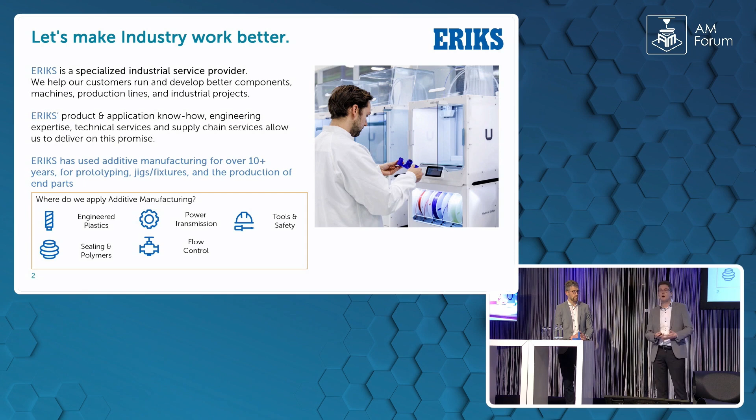And we have been applying additive for the last 10 years. First, really with seals production, so that we didn't have to make a mold. We made prototypes. Then afterwards, really with jigs and fixtures, and now we're also in end parts. And we do this for various departments, not just for plastics, but also in the realm of flow control, safety and tools, as well as in power transmission.

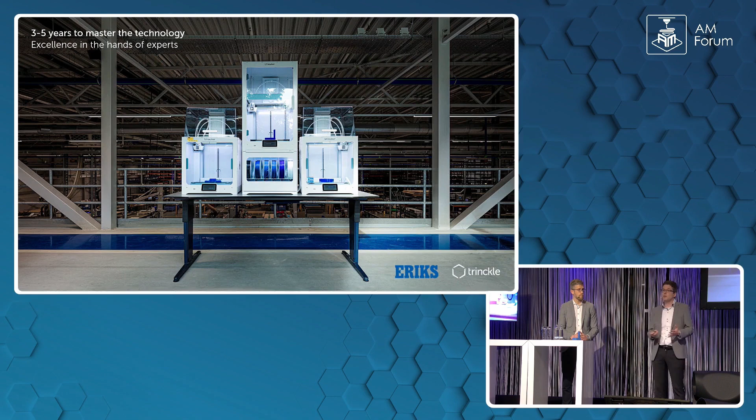So one of the things that really intrigued me, I've been now busy with this topic of 3D printing, additive manufacturing for about 7 years. And what really intrigued me is always how it still takes quite some time to really master this technology. So how you can mitigate for the shortcomings, but also really make sure that you utilize it for where it really works best. So having the engineers really engaged with this technology, ingraining it in their daily processes, and really thinking about how to use it next has been quite the journey for them.

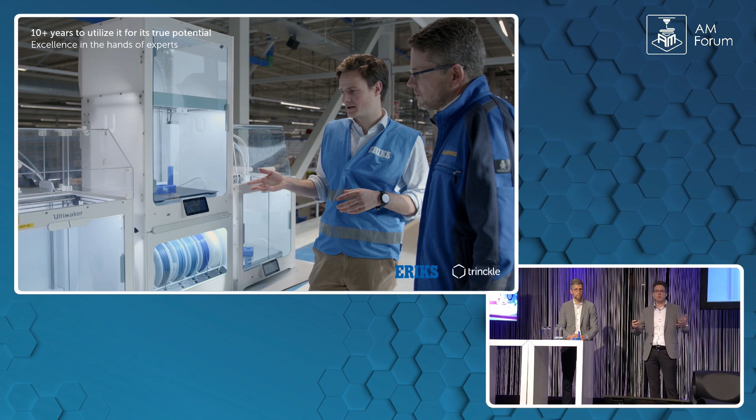But there's another journey that's going on, and that's, of course, the company, where we are with 5,000 people, of which more than half is sales, and a lot of distribution and production as well. And how do you adopt it, for example, in a larger company? This has been also quite a journey, where we first had little islands where we were doing some printing. That became a central team, really pushing hard for adoption. And eventually, we really chose a community approach, where we had many printers scattered around, and people were really adopting it in their own departments.

So I didn't expect this myself, but jigs and fixtures has been one of the key drivers of the adoption within our company. So we first came from prototyping, and then we really went to jigs and fixtures. And I think it's also a nice way and a nice blueprint of how to ingrain this in your organization. Not just from the fact that jigs and fixtures can really help you with the efficiency of your processes, so really already giving you that efficiency benefit.

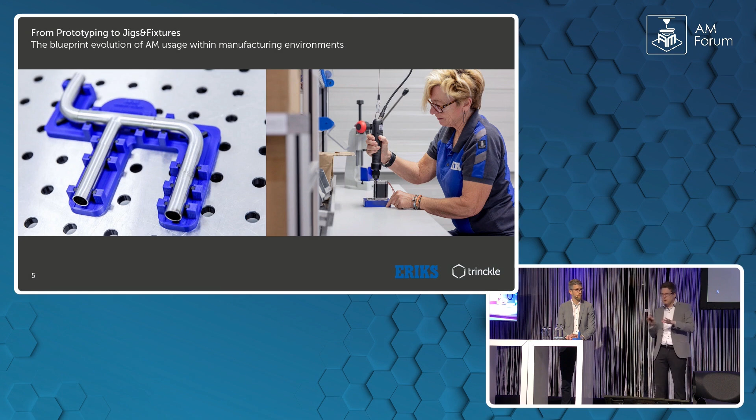It's also a very tangible result, but it's also a tangible result to many different groups in your company. So this is the engineer, but also in production manufacturing, also with quality control. And for the people that really love numbers, the efficiency, of course, really helps with the people in continuous improvement or in finance. So it really taps into different parts of the organization, really helping with this adoption. So we're finding them everywhere.

And we're also not really particularly focusing on one or two, but we have assembly tools, we have machining fixtures, welding tools we're experimenting a lot with, and we're making them a lot as well. Shot blasting tools so that you cover off areas, but also safety jigs. So there's many ways how we basically apply it.

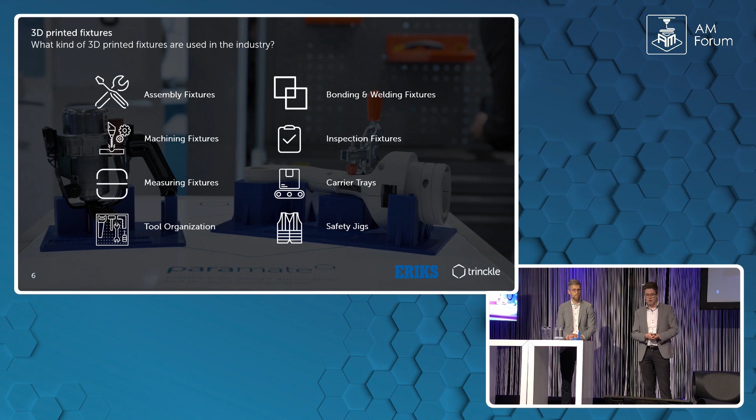And I want to show you one of the latest examples. So it's this one, and I will have one of our engineers do the talking for me. So this is a small jig that we made, and it's to help the people in our production facility to assemble the parts together. It's made out of a motor and an electronic component.

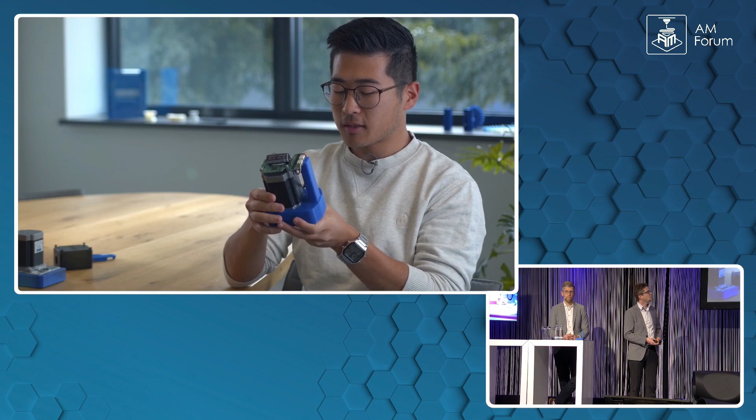As you can also see, this electronic component sticks out a little bit, and whenever they would assemble it together, it could flip over to the side because they have to apply a small amount of pressure on this side. So by making this jig, we made their job significantly easier for them. And where they would be struggling with getting all the parts assembled, they can now do this in maybe 1 minute instead of taking 2 to 3, because they would struggle with keeping the parts aligned with each other.

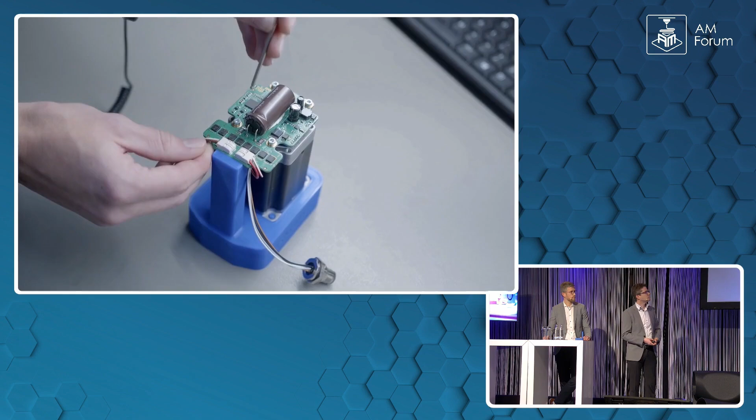So as you can see, I mean, it doesn't look too fancy, doesn't look super sophisticated or high-tech, but it really works. And the thing for us was, okay, so the potential of all these jigs is there, so why don't we see hundreds of these jigs in our organization pop up? Why don't we have a lot of people engaged in this?

And then we really realized that you always need an engineer to draw them, or you need to have a very good drawing, and then you need to engineer the counterpart, which takes quite some time. So how can you reduce this bottleneck? How can you make sure that the CAD design processes that are now restricting this creative process, let's say it like that, do not hamper this anymore? And this is why we chose Fixture Mate.

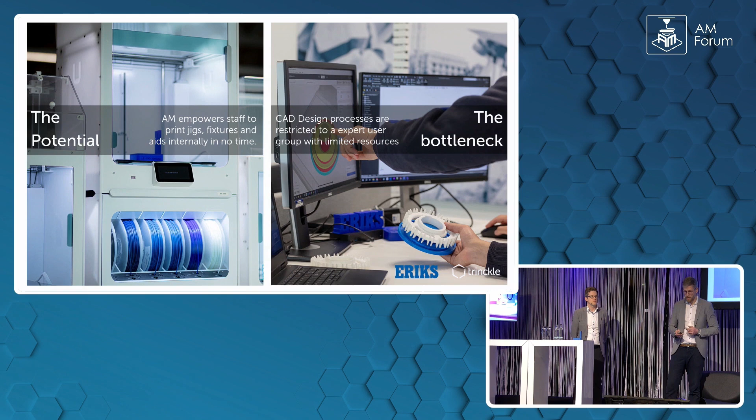Yeah, thank you very much, Job. And this combination of the potential of the technology, and on the other hand, the bottleneck of the engineering, we see at quite many of our customers. And that motivated us essentially to bring up a product which is called Fixture Mate. So a design automation software dedicated to this kind of application, for creating fixtures.

And there are basically two goals. On the one hand, we want to make the whole process more efficient. So we want to tremendously reduce the minutes, hours you have to invest into this. So we speed up the design process for experienced engineers. And on the second aspect, it shouldn't be focused on the engineers only anymore. So we want to enable people without deeper CAD skills to design those kinds of parts.

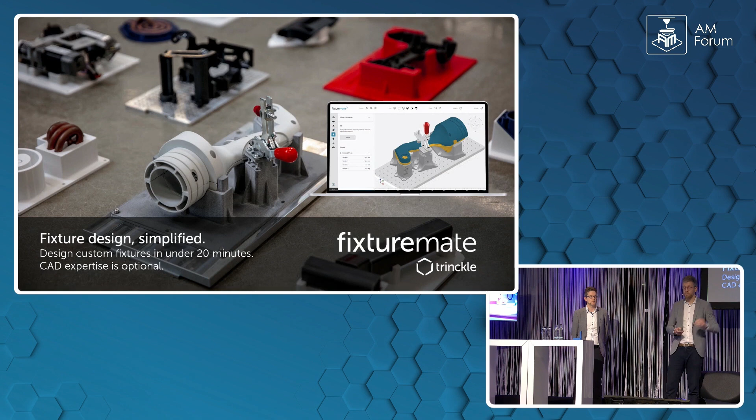We are not talking rocket engine parts here. They are simple parts, and these design jobs are quite good in the hands of the people that actually need those fixtures in place. So we want to enable them. That was the target. And I want to show this on one example from ERIKS.

And what we see here is a cover which has some motor and gear elements inside. The cover is meant to protect it in a rather challenging environment. So you have to assemble a couple of very small, tiny parts inside this cover. And we learned that for this assembly process, it would be great if you had two positions, one upright, like on the left side, and one slightly tilted on the right side.

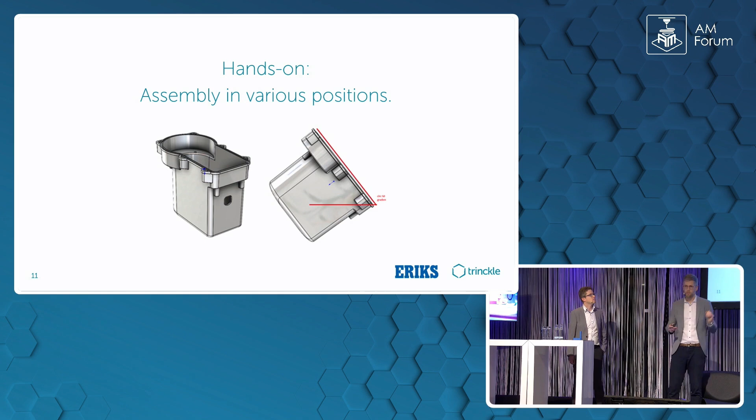And ideally there would be a fixture that has both positions in one fixture. You can change the position, and this little hole in the front should be accessible at all times. So that is the target for a little fixture here. So this is the end result.

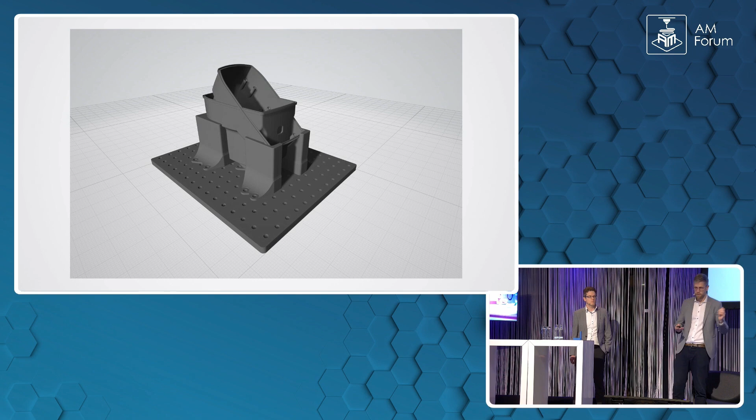I hope you can kind of understand what you're seeing, because we basically tilted the position of the part, and we now have that in this rendering. We see both positions of the part in the fixture already. So quite a nice, easy fixture. And now I want to show you how we would design that in Fixture Mate.

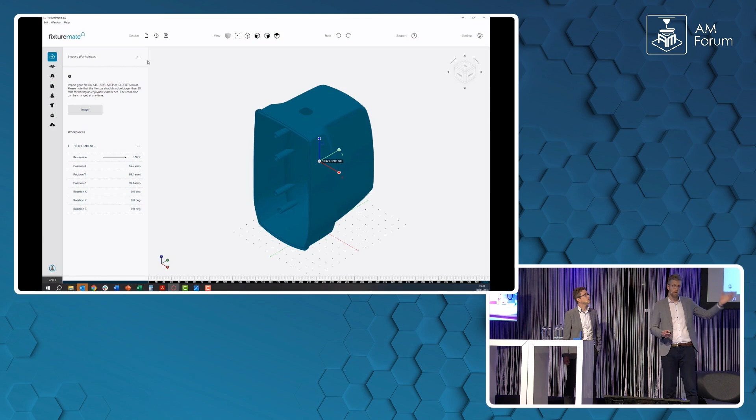So let me talk you through this process. Remember, the ultimate goal is we want to enable people that do not have in-depth CAD experience. So this is why we bring them through a quite intuitive process from uploading a part to downloading and exporting the fixture.

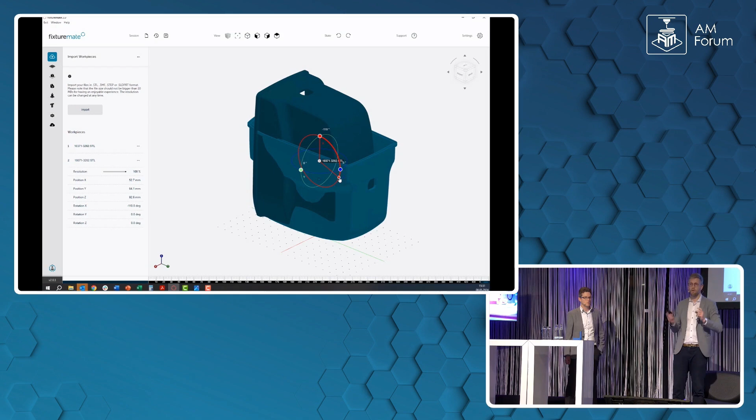So I bring in this cover. I bring it into the first position and I position it in an orientation I like. And then I bring it in a second time. So I want to create the second orientation, the second positioning of this cover. So now slightly tilted. And so you guys can recognize it easily, I color it in a different color. So we have this blue and now the yellow version as well.

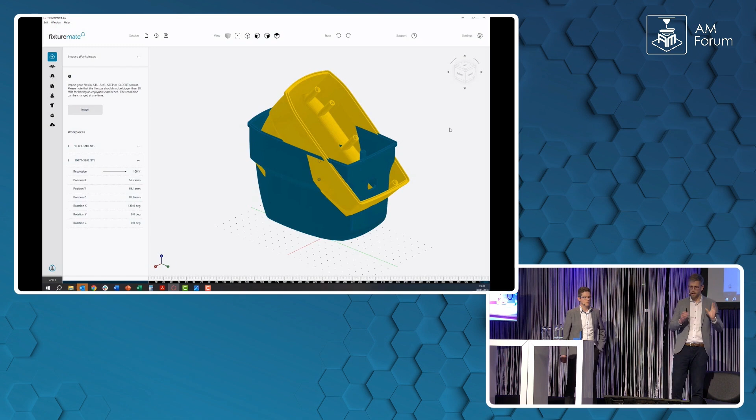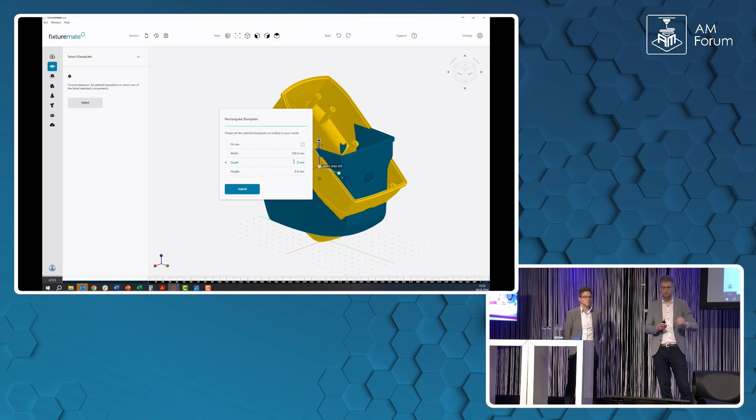And now for these two orientations, I want to create a fixture, basically a nest geometry. The first thing that we do is we choose a base plate. So in the second step, I have the chance to design my little base plate here. Let's start for a moment with a 3D printed one. So imagine the overall nest would be on one plate, even the plate is 3D printed.

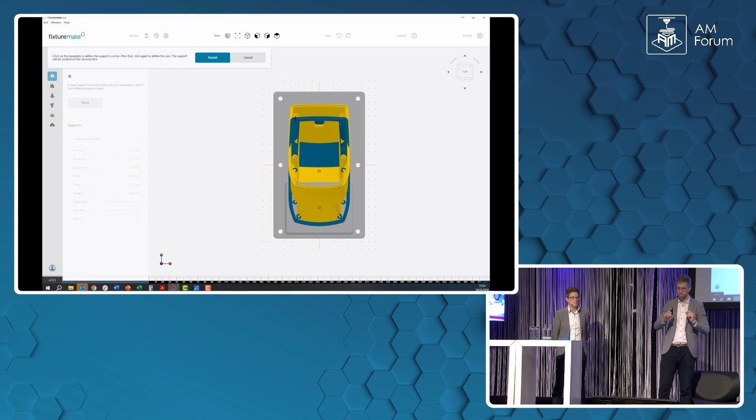So the next thing that we want to do within the software is creating some support geometries holding these parts, those two cover versions in a secure position. And as you see now, we do that by dragging and dropping. There are some marker points in the user interface, so you see it's quite far away from a traditional CAD tool. It is really simple to use. So you create those kind of supports.

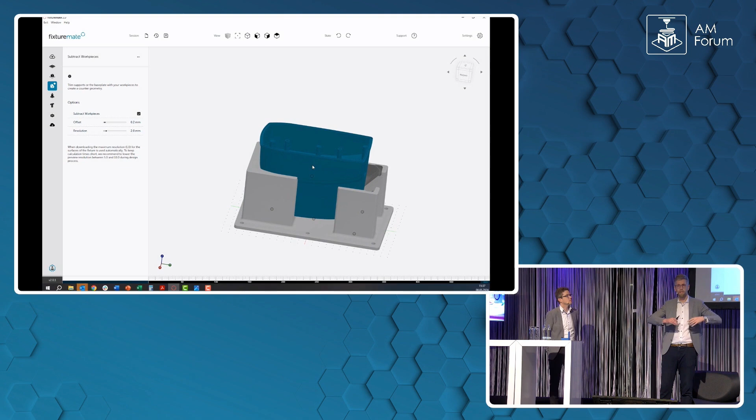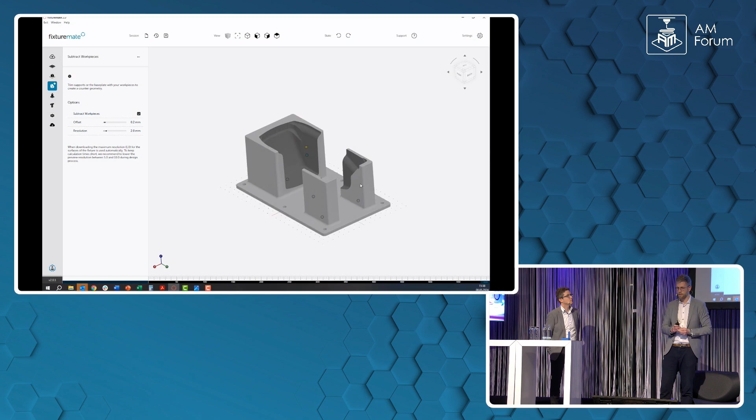You might think, oh yeah, but there are still these overlaps, there are still these conflicts. Bear with me for a second. Yes, that was the moment where we cleared the path, so we subtract the work pieces from the nest structure. If we hide both of those covers, you can see now the negative, the cavity that we created in those two positions, and both are held in place in the right orientation at the same time. The hole in the front is still accessible. So this would be now the version where the base plate is part of the 3D printable design.

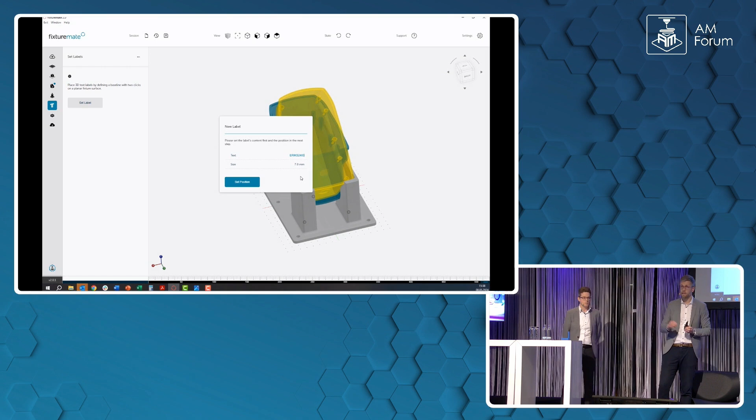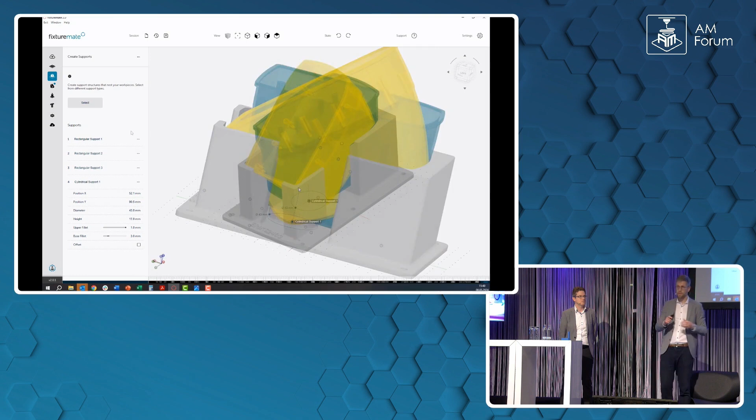In a second or so, we will jump over to another alternative. Oh yeah, before that, we still want to get a little label on top. Kind of a nice little feature that it's super easy to apply a label. There are a couple more features hidden in the tool, but I cannot show everything now in 2-3 minutes. So, of course, you cannot only create these rectangular boxes, you can create kind of any shape, really, but it's always supposed to be in a very intuitive way, so you have a couple of mouse clicks in the software, in the user interface.

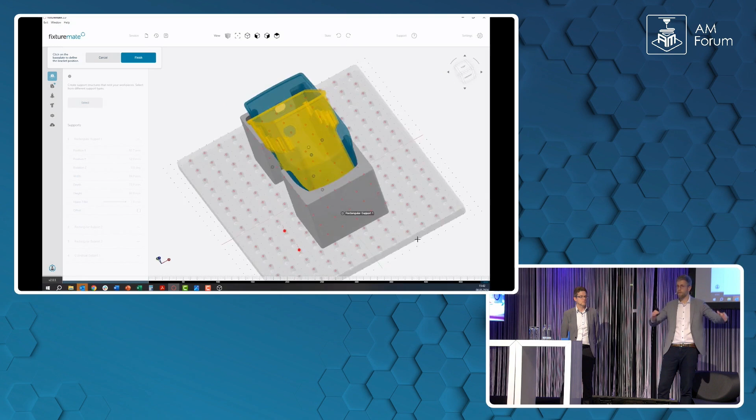And we like these kind of designs, like the all included on one 3D printed object, but there is even one situation which we like more. We like hybrid designs of those fixtures. For some scenarios, it's really not meaningful to design everything in one 3D printed object. You would rather combine it with something that you already have on the shop floor. So let's imagine we had a perforated board on the shop floor already. So this perforated board we can use and then connect it with the 3D printed objects.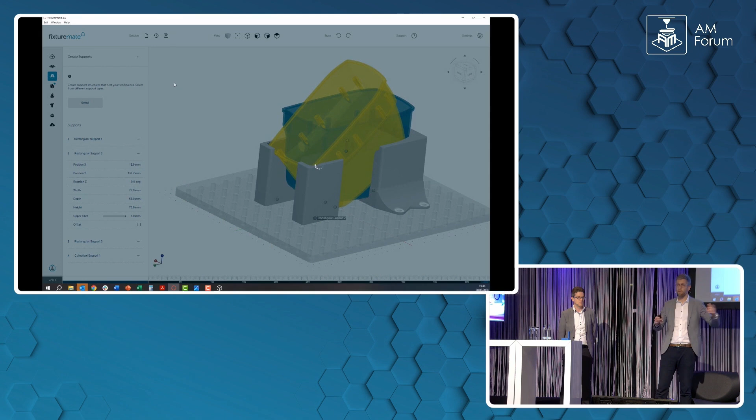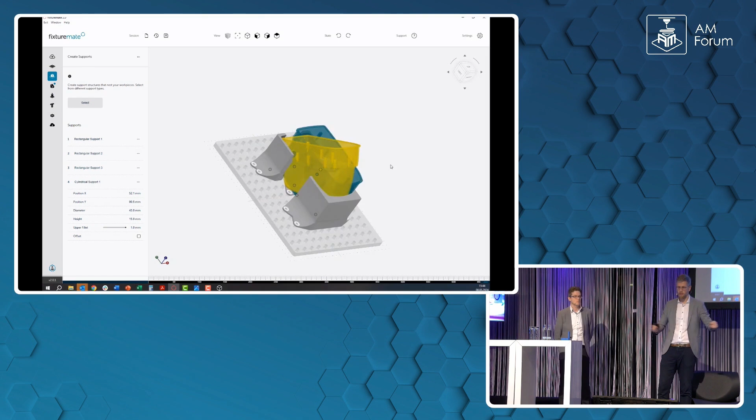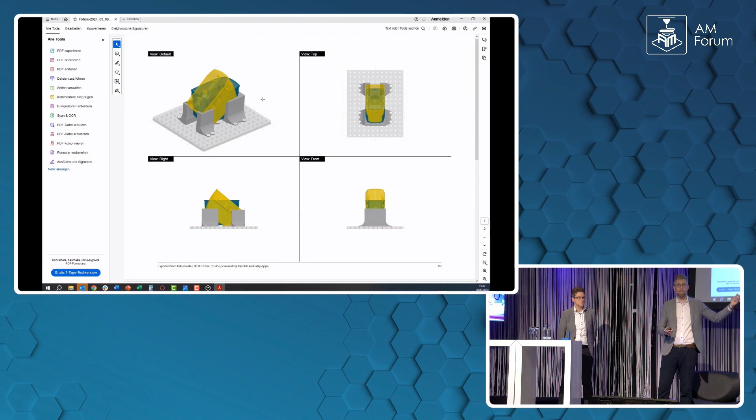What we need for that are these mounting structures, and you see already it's quite nice to place them. You just select those holes. The algorithm knows the grid that you have underlying. So with a few mouse clicks you have these nice mounting contours ready. And at the end you will get not only the 3D printed part, but also a PDF that gives you all the mounting guidance, basically. So this is what you hand back to your assembly team, and they can print it on an Ultimaker or any other low-cost printer of your choice, and they are ready to go.

So what did we achieve? Most importantly, we unlock the community that Job mentioned. We want to enable people to use it, and they don't necessarily have to be experienced CAD engineers anymore. But even if the engineers are using it, probably they will enjoy it too, because it reduces the time of design significantly, by 80% roughly.

And then if you imagine this combination, that gets really charming. Then you design it in 15 minutes, 20 minutes, you send it to the printer, you print it, you use it the next days. And even if something is not perfectly right, then you just do it again, it takes you a second day. And then you have the perfect fixture. It allows you to iterate fast.

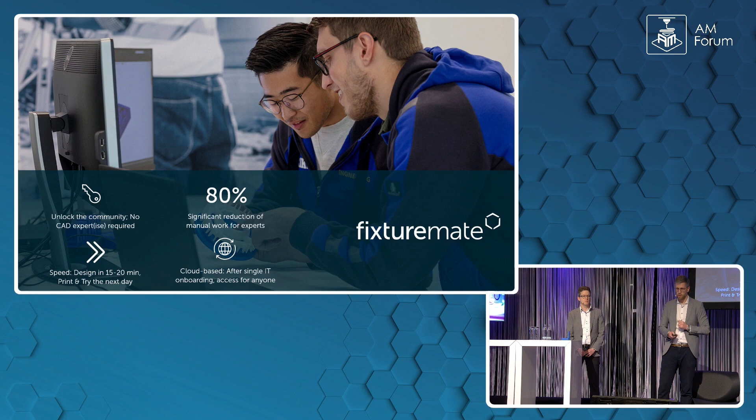And the software is cloud-based. That means you can roll it out across your organization quite nicely. You just give access to different departments in your organization, and you motivate them to make use of the 3D printing technology. What were the results for ERIKS? On the one hand, the time saving for the individual design time, it's 83% on average.

In total, we enable them to create a fixture, design and print it in basically 1 day. And the software is super simple to learn. It's not that you need to dedicate weeks for education or training on it. If you use that software for 1 hour, I promise you that you can create your first fixture designs. It's really not a problem.

But more interestingly, I think we should look at those use cases you mentioned. Yeah, exactly. So if you remember the first video where we made this one, the engineer who was presenting it to us, actually he was part of the team trying to roll it out, and he convinced a colleague who was non-engineer, non-CAD user to make this jig. They did it in 2 iterations of 20 minutes.

And yeah, as you can see, then I started asking him, so what did you save? He saves 15,000 euros on efficiency per year, so 7,000 of these are made, the end assembly, 2 minutes saving per end assembly, but also the first time right quality went up. So we're saving something roughly like 20,000 euros in a 2 times 20-minute cycle, so that's pretty good.

Well, also, that was so motivating to that department that they kept on seeing new examples. There's now about 10 of them, so they're saving about 100,000 last year and also this year again, of course. And because they're part of a community, they started infecting the community in a very positive way, and they started finding also new examples. So it really worked.

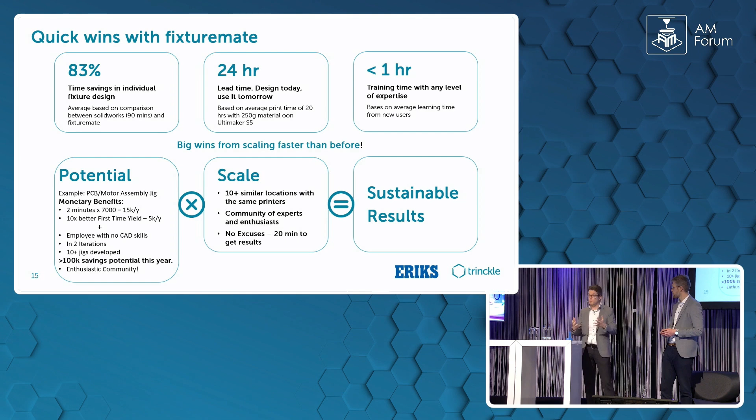The community of experts now also includes enthusiasts. So that's not just the people that can engineer, but also from sales or from production who really like to dig into this expertise and to learn more about it and seeing these opportunities. And we really took away the excuse. You know, there's no excuse not to spend 20 minutes on trying to find a solution to a problem that you have in production or somewhere else.

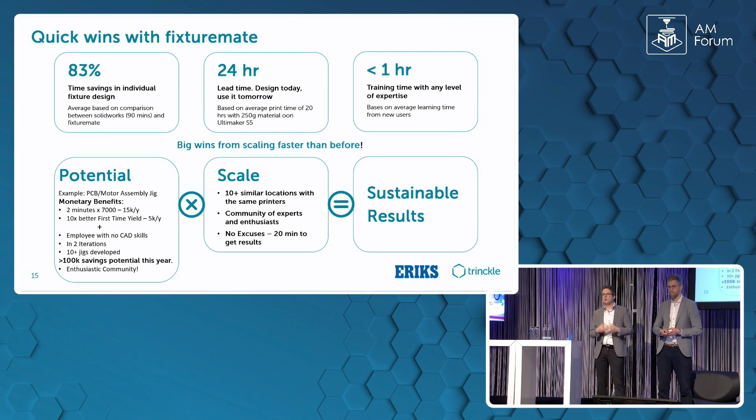So this really creates a positive cycle where we can really see this is sustainable results and the community will carry it, not just 1 or 2 persons. And I think that's really important. And that brings us to the last thing.

I think that innovation power and innovation adoption really has to do with if you can make it simple and applicable enough that you really drive this innovation home. So making it simple for a lot of users and having a lot of different applications where you can use it. So it really works for us. So do have a look at how we do it.

So me, myself, I'm not an engineer, and I also was able to learn it in roughly an hour. I find it very intuitive, but I'm always depending on a lot of people around me to also do that. So we did it working with a workshop, or for example, we can start with the videos that are there. Then we went to a workshop where you explain it in an hour, and then we took it really into the organization, and we're driving it ourselves.

And the results are here, so I hope we'll have many more. Perhaps you can design some for us today, and then we'll have even more results. So that would be great.

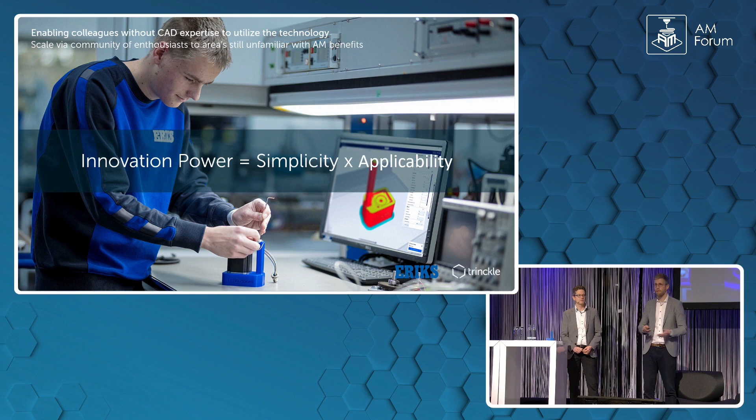Yeah, thanks, Job. So that would be our key takeaway for you guys. So it's fantastic that we have all the great technologies here, but it's really important that we keep it simple and keep it accessible to the organizations. We need to bring additive manufacturing out of this niche. We need to make it scalable, so we have to think first about enabling the organizations. That was the main point we wanted to make.

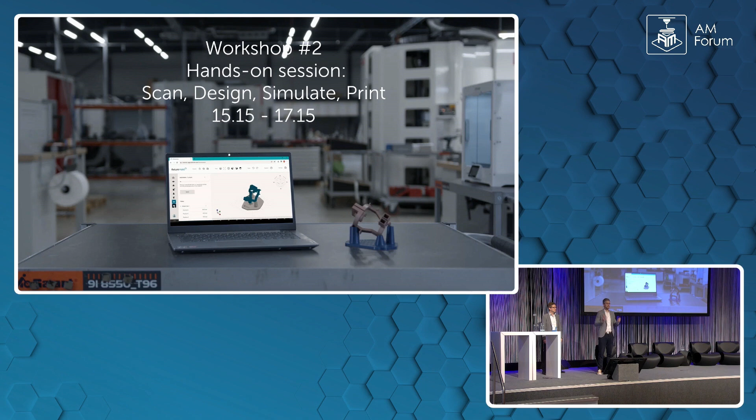We wanted to show the software live here on stage, but I was not allowed to bring my notebook on stage. It was a little bit too much of a hurdle, but you have another chance to experience it if you are interested. There's workshop number 2 later today, where we will show you in a couple of 20-minute sessions how to design not 1 but 2 fixtures in these 20 minutes. My colleague Damien and we will do that, and we would like to see you there, and we can then prove that the simplicity we are promising here is true and is in the software.